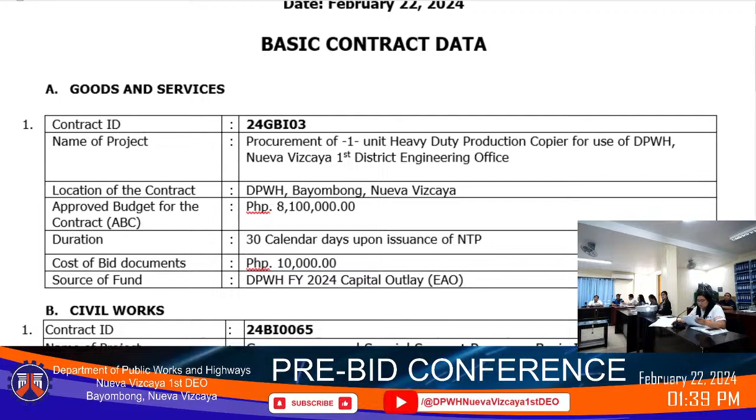The technical specifications for the heavy-duty production copier: for technology, it should have LED printer print technology, with imaging devices for each color — CMYK — and a toner ink system. Print speed for CAD mono or color should be 4 D/A1 prints per minute, or for CAD mono color, 2 E/A0 prints per minute. It should have 9 print modes, a scan resolution of 600 by 600 dpi, and a print resolution of 1200 dpi.

For media handling technology, the auto-switching feature automatically selects the correct roll for the print job based on media type and roll width. It includes automatic roll switching when the end of a roll is reached, automatic width detection, and automatic adjustment of the gap between media and print head. For the scanner, the technology used is CIS, or contact imaging sensor.

The resolution of the scanner is 600 by 600 dpi. The scan speed should be 49.1 per minute monochrome scanning, or 15.2 millimeter per minute monochrome scanning. The controller for the heavy-duty production copier, for the OS operating system, Windows 10.

Processor is 6-core 6-thread i5 8500 at 4.1 GHz. Memory should have 8 GB DDR4. The hard drive is 2 times 500 GB.

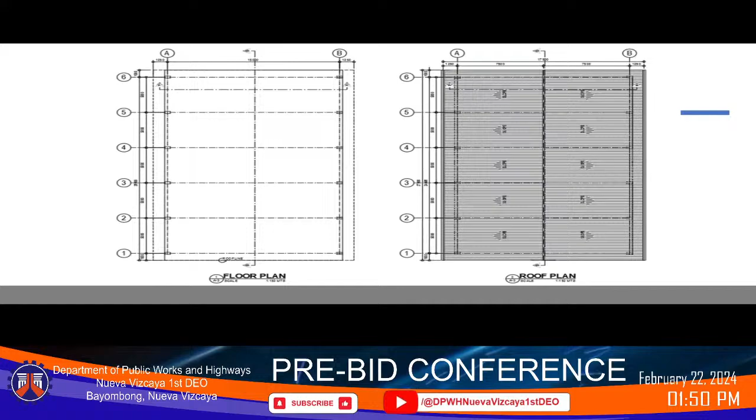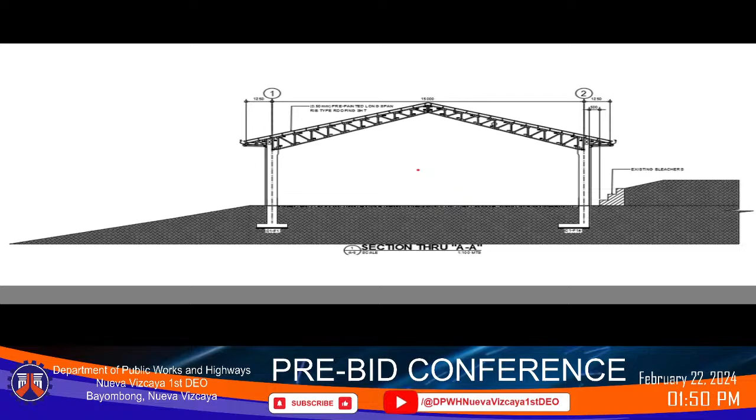Next slide. This is the section through A-A. And this is the perspective view of the project. That would be all, sir. Thank you.

Thank you, Engineer Angie Reyes, the preparer of this first project with contract ID number 24BI0065. Again, may I know from the Secretariat, does anyone from our YouTube live viewers have questions or clarification, especially our prospective bidders for this first project? None? So let's continue, fellow BAC members.

Let's start from provisional member from all types of procurement, Architect IB Salazar. I have no amendment sir. Noted, Architect IB. For our BAC regular member, Engineer Reden A. Milyare, no amendments Mr. Chair. Noted, Engineer Milyare. For our BAC vice chair, Engineer Danilo A. Bernabe, no amendments Mr. Chair. Noted. Since majority of the BAC members have no amendment for this particular project with contract ID number 24BI0065, then we will adopt the basic contract data as advertised. Take note, Engineer Brian Neil Augusto, our head secretariat.

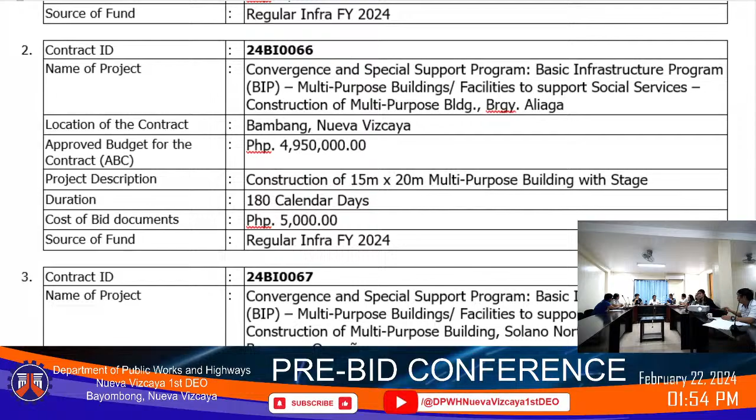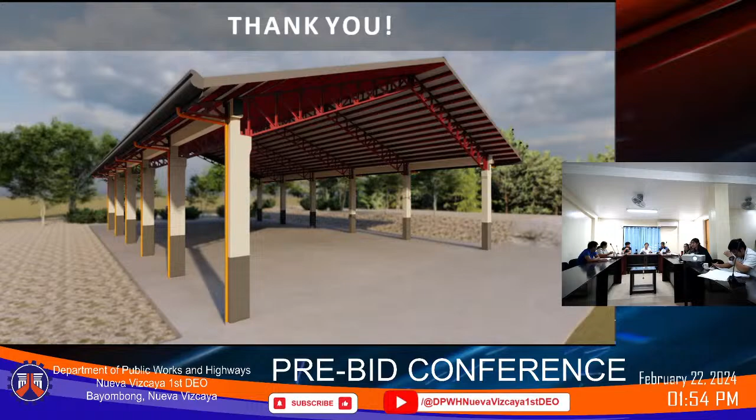So this proposed project entails the construction of a 15 meters by 20 meters covered court and 11.8 meters by 8 meters stage, encompassing all phases of construction, starting with the laying of foundation works, erecting columns and beams, building both interior and exterior walls for the stage, and roofing system. The finishing works will involve plastering and painting for both structures and tile works for the stage. Additionally, the project will incorporate the installation of storm drainage and downspouts for sanitation facilities along with the completion of electrical installations, including lighting and fixtures. The aggregate utilized in the project is extracted from the Kupas Quarry, located at a distance of about 7.58 kilometers from the project site. On the other hand, the materials essential for the project are sourced from Bambang proper.

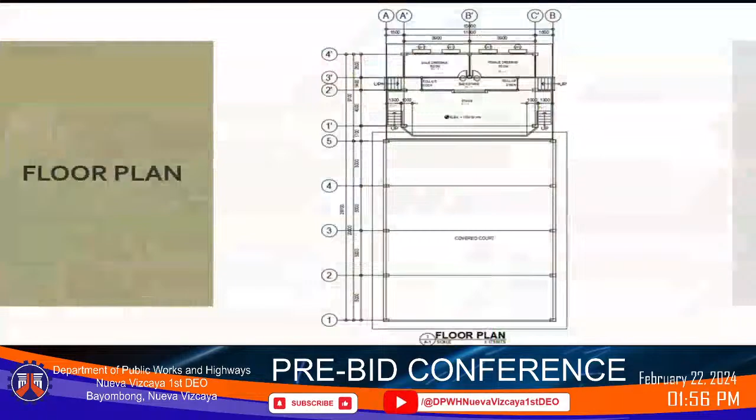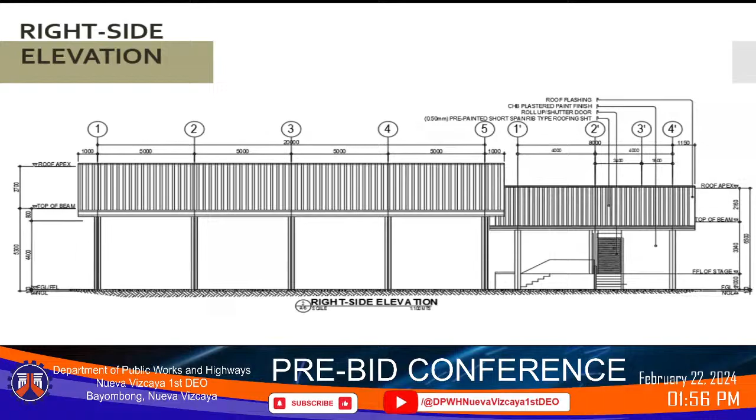Next slide please. So here is the floor plan. Next slide please. The front elevation, rear elevation, right side elevation, and the left side elevation.

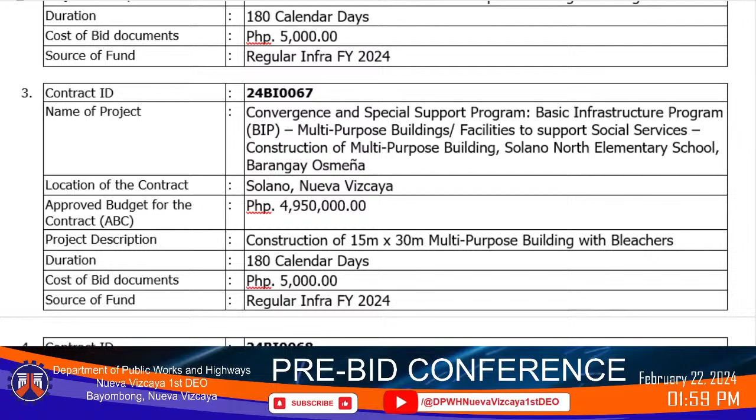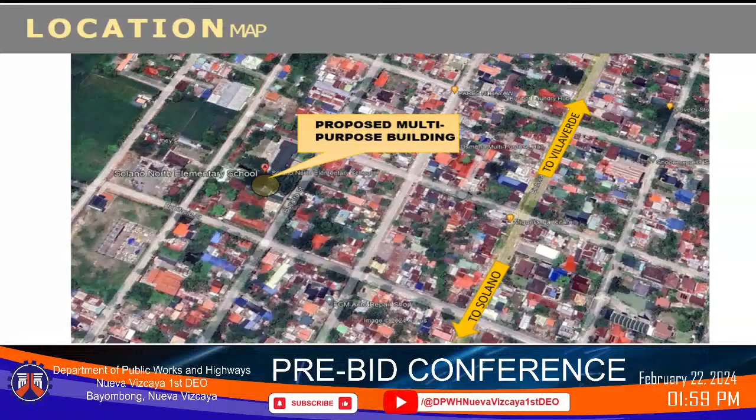Next slide, please. So this is the location map of the project. Next slide. Next slide po. This is a geotag photo with geotag description of 16 degrees, 31 minutes, 20 seconds north, 121 degrees, 10 minutes, and 41 seconds east.

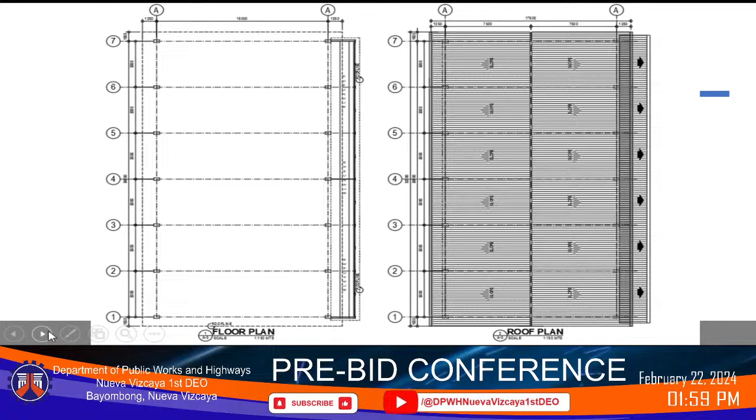Next slide. This is the floor plan and roof plan. Next slide. This is the typical front elevation, rear elevation, and the typical side elevation.

So this project is a construction of 30 meters by 15 meters multipurpose building with bleachers at the right side of the building. This project will be constructed completely from the foundations, columns, beams, and roofing systems. The existing floor slab will be removed and replaced. Storm drainage, electrical wirings, and lighting fixtures will also be provided. The source of aggregate for this project will be in Madyangat Quarry, approximately 5.4 kilometers from project site.

So this is the perspective view of the project. That would be all, sir. Thank you.

Thank you, Engineer Angie Reyes, for your presentation of this project with contract ID number 24BI0067. Again, from the Secretariat, may I know if anyone from our YouTube live viewers, especially our prospective bidders, have questions or clarification regarding this particular project?

None? So, fellow members, let's start from provisional member from all types of procurement, Architect IB Salazar. I have no amendment, sir. Noted. Our board regular member, Engineer Reden A. Milyare. No amendments, Mr. Chair. Noted. Our board Vice Chair, Engineer Danilo A. Bernabe. No amendments, Mr. Chair. Noted. Since majority of the board members have no amendment for this particular project, so take note again, Secretariat will adopt the basic contract data as advertised.

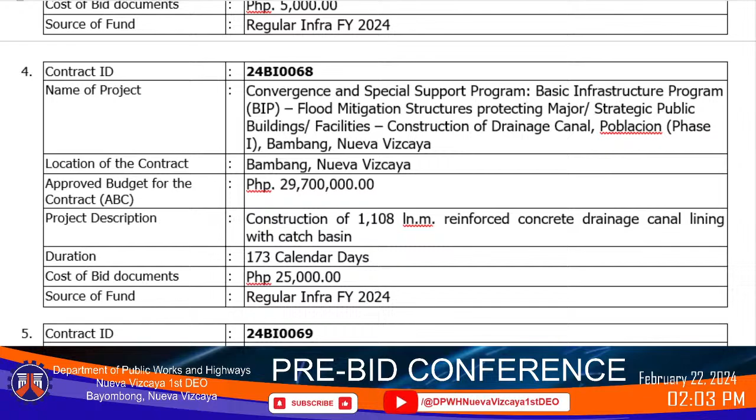This is the location of the drainage canal lining. It is two sections besides the Save More, from Barangay Poblacion, the centro of Bambang, Nueva Vizcaya.

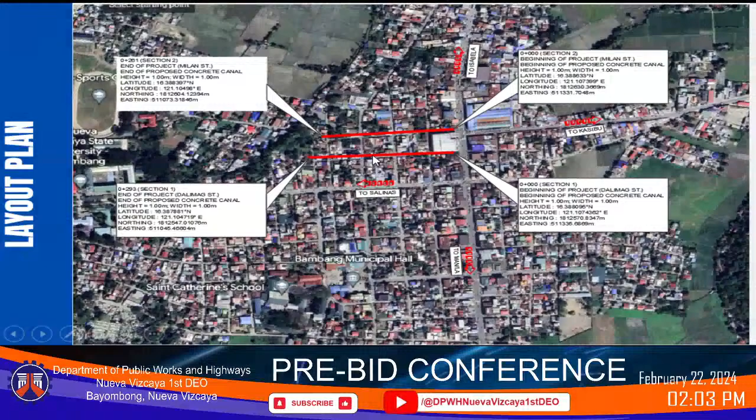This is the project quarry site, the Magat River, Makate section. The project site is located at Poblacion, Bambang, Nueva Vizcaya, 3.7 kilometers from quarry site of Magat River, 400 meters from Bambang Municipal Hall, and the source of cement and RSB at Barangay Poblacion, Bambang, Nueva Vizcaya.

This is the topographic plan of the two sections. Every intersection or corner of the streets has a proposed catch basin with a height of 1.3, width of 1 meter, and a length of 1.60 meters.

This is the beginning of Dalimag Street. The beginning of the project is along the National Highway, and the end of the project is near the end of Boy Street.

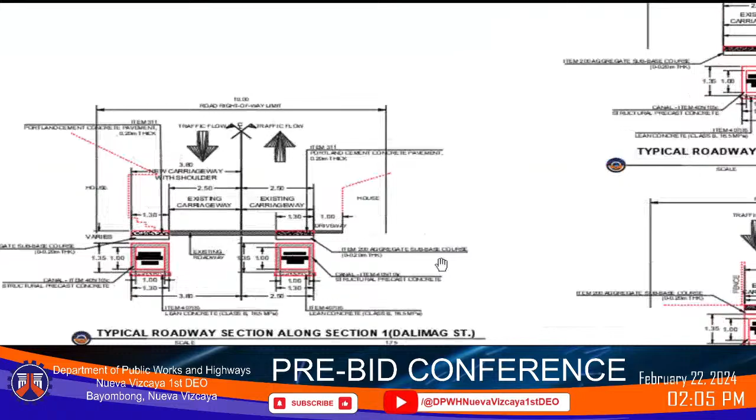This is the typical section of Dalimag Street. The drainage canal has a height of 1.35 and a width of 1.3 meters, with a base of precast lean concrete.

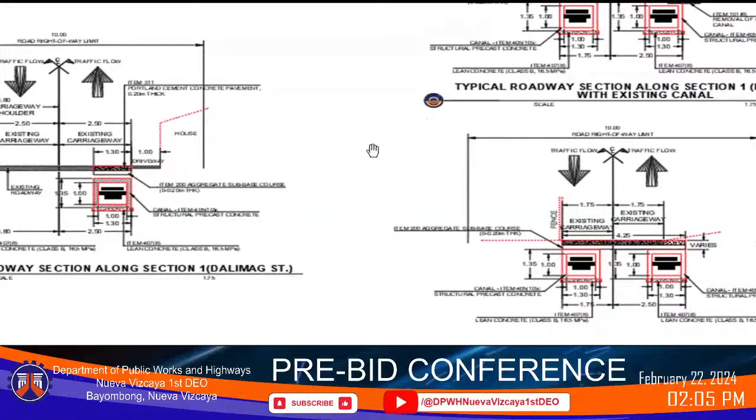This is the typical covered section of a canal with manhole.

And that is the end of my presentation.

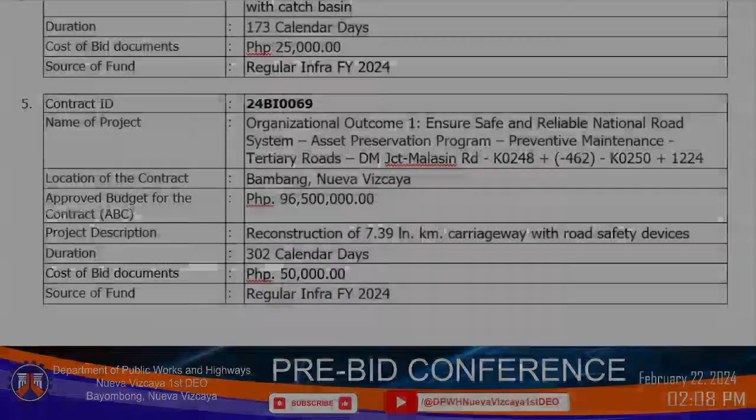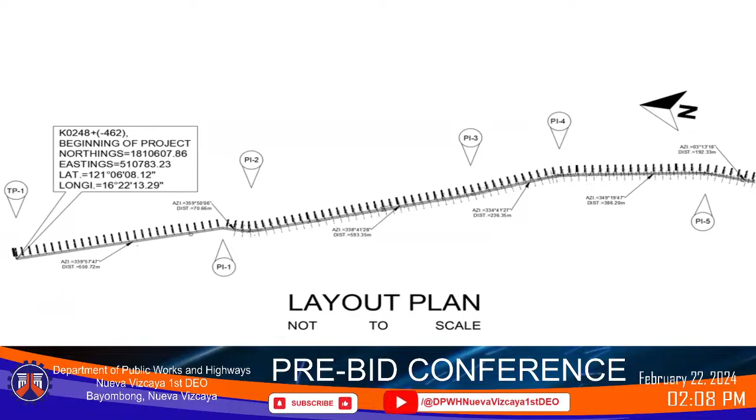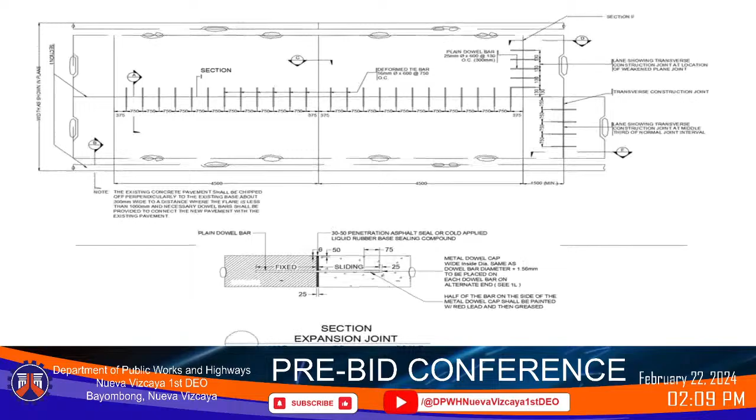The scope of work for this particular project, sir, is the reconstruction of 7.39 lane kilometer road with a thickness of 0.3 meters, and the width is 3.05 meters.

The spacing of the tie bars is 750 mm, and the plain dowel bars use 25 mm diameter, spaced at 130 mm OC.

Another scope of work for this project, sir, is the installation of solar street lights. It is solar powered, LED roadway lighting with 60 watts, with a GSL 36 watt smart LED solar street lights, IP65, in lumens.

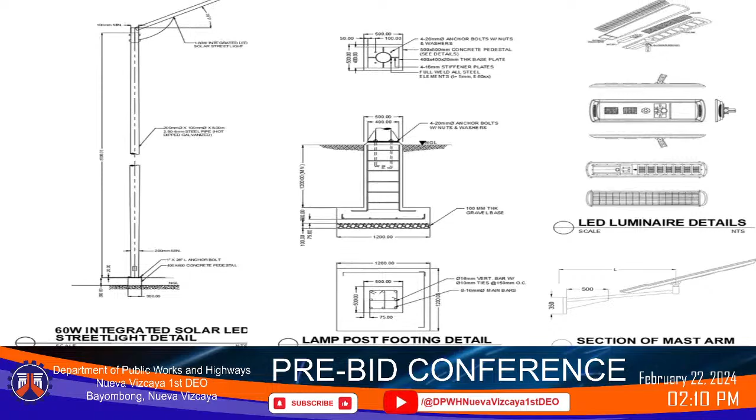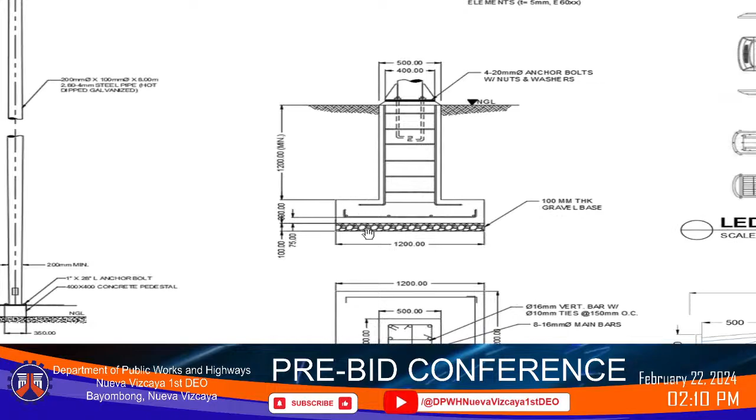It is solar powered. For the base, can you please zoom in for the footing? The dimension is 1.2 meters squared, and the thickness of the footing is 0.3. For the pedestal, up until the NGL, 1.2 minimum. Then the height of the pole is 8 meters.

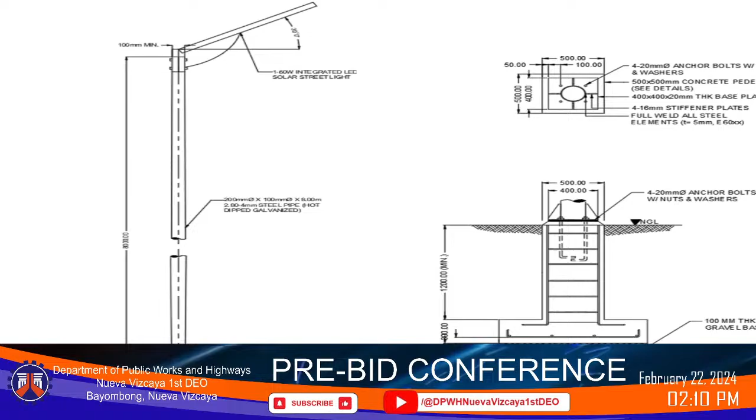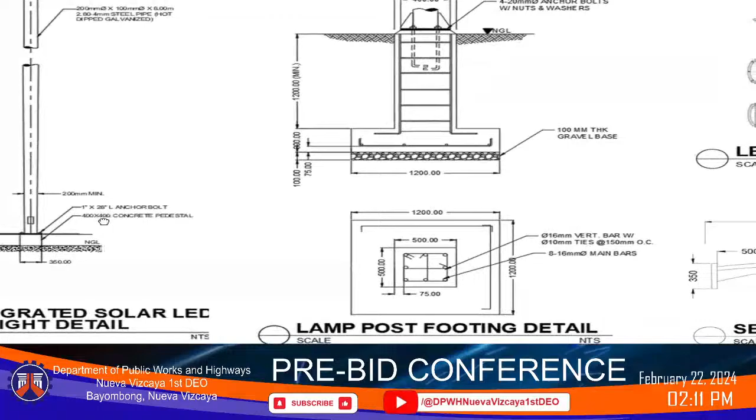8 meters mounting height pole with a 1.5 meter single mast arm at the top for the solar light, with a round steel tapered post, bottom diameter 0.2 and top diameter 0.1. The thickness of the pole is 4 mm. It has a base plate of 20 mm by 400 mm by 400 mm, and a stiffener plate of 16 mm by 200 by 100 by 20 mm, hot dip galvanized.

Another feature for this project is a guardrail with end piece. And I think that's all for the scope of work.

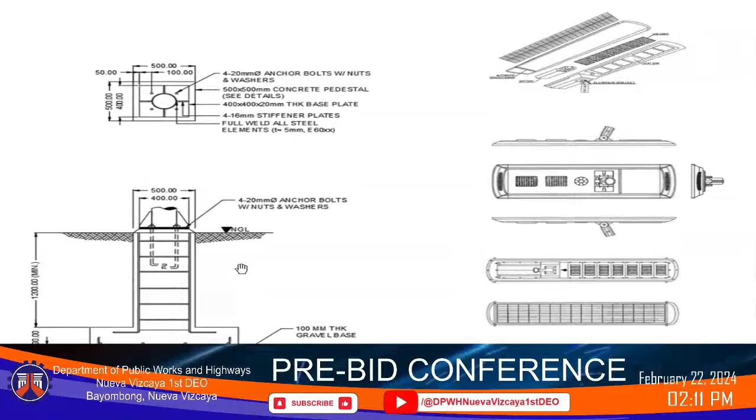I didn't include it, sir, because I forgot to include it. So let me just explain that there is a metal guardrail included in this project, with an end piece on both sides.

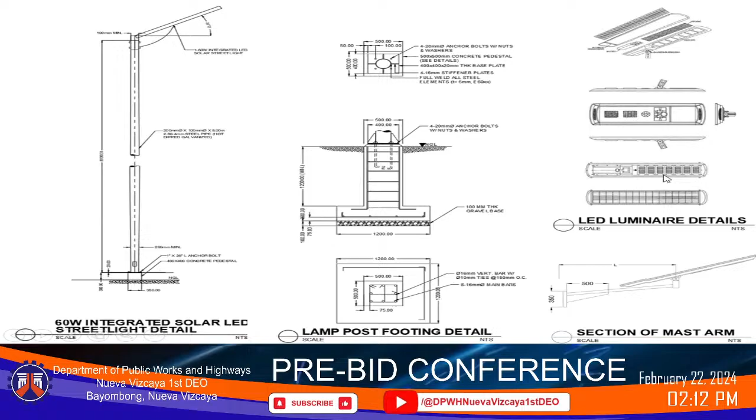Please see the detail of the pedestal of the solar light. If you look at the left side, the one with the solar post, and the NGL on the other side.

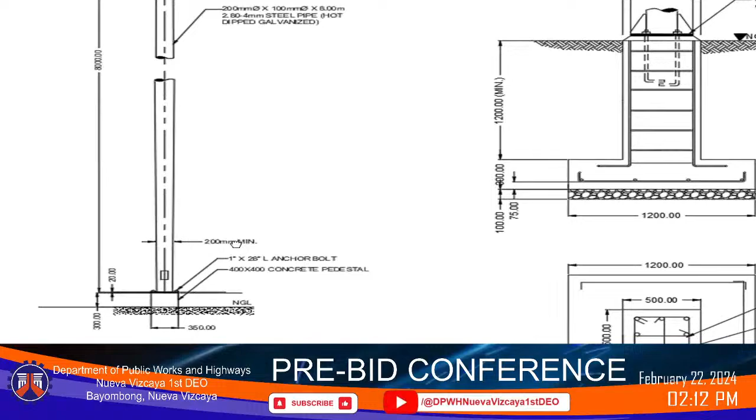The NGL and the top of the pedestal, how much is the difference in elevation? As you can see, sir, we have the dimension at the bottom left at 300 millimeters. Okay, please see the detail of the enlarged pedestal.

Okay sir, let me check through the plan, sir. What is the correct design if it is elevated from the NGL? For the information of our prospective bidders, is the 200 millimeters based from the finish grade line of the pavement? It seems that detail is slightly wrong.

Sir, let me check, sir. But I think the bigger scale model of the pedestal is more correct, I think, sir.

So the top of the pedestal is the top of the NGL? I think so, sir. Are you sure? I'm not sure, sir, but I think that's the case. No, we need to clarify this for the prospective bidders, because if it's like that, there's a tendency that the bolts will rust.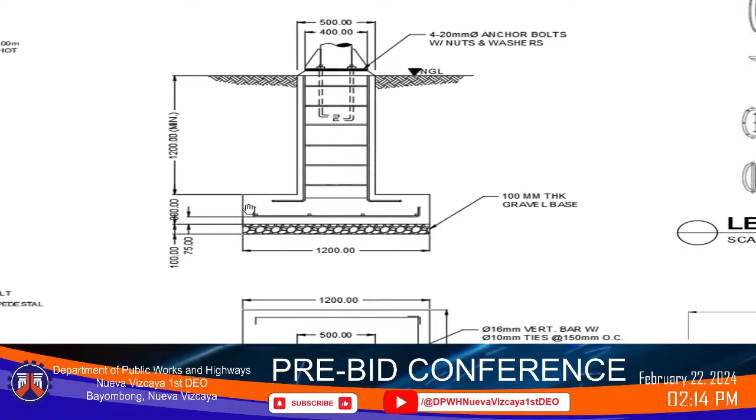Okay, please take note, Engineer Joseph Padukul, for the correction of the detail. And please also add, for the information of our prospective bidders, some details of the guardrail, typical details of the guardrail, to be corrected.

Okay, any other questions from the secretariat, from our YouTube live viewers? Does anyone have any questions or clarification for the last civil works project for the day, with contract ID number 24BI0069? None? Okay, let's continue.

Fellow BAC members, provisional member from all types of procurement, Architect IB Salazar, do we have any amendment? Sir, I have an amendment, sir, for this particular project, regarding the name of the project.

Okay, from Organizational Outcome 1, Ensure Safe and Reliable National Road System, Asset Preservation Program, Preventive Maintenance, Tertiary Roads, DM Junction Malasin Road, K0248 plus negative 462 to K0250 plus 1224.

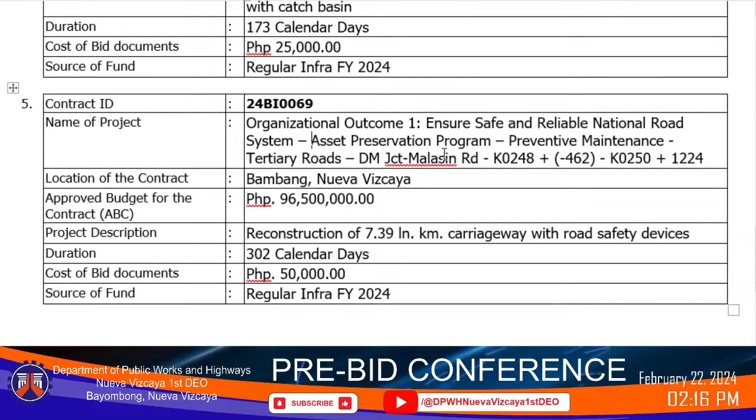2, Organizational Outcome 1, Ensure Safe and Reliable National Road System, Rehabilitation / Reconstruction / Upgrading of damaged paved roads / tertiary roads. That's it, sir.

So we have a correction for the name of project, as per take note, Secretariat. So as per the GAA, the correct name of project includes rehabilitation. So we'll correct, we'll amend the name of the project.

From Organizational Outcome 1, Ensure Safe and Reliable National Road System, Asset Preservation Program, Preventive Maintenance, Tertiary Roads, DM Junction Malasin Road, K0248 plus or minus 462 to K0250 plus 1224. 2: Ensure Safe and Reliable National Road System, Rehabilitation / Reconstruction / Upgrading of damaged paved roads, tertiary roads, K0248 plus or minus 462 to K0250 plus 1224.

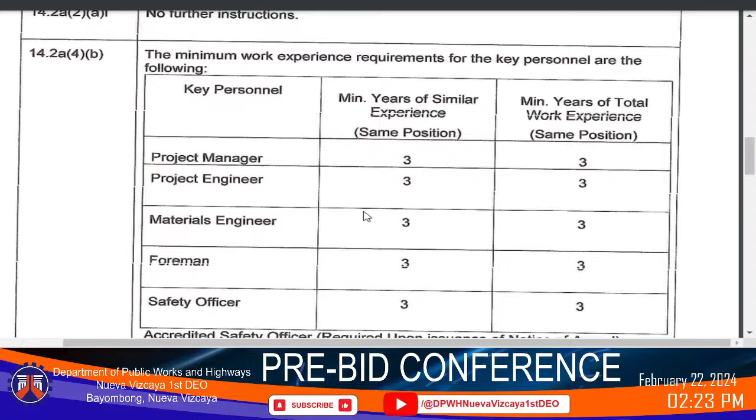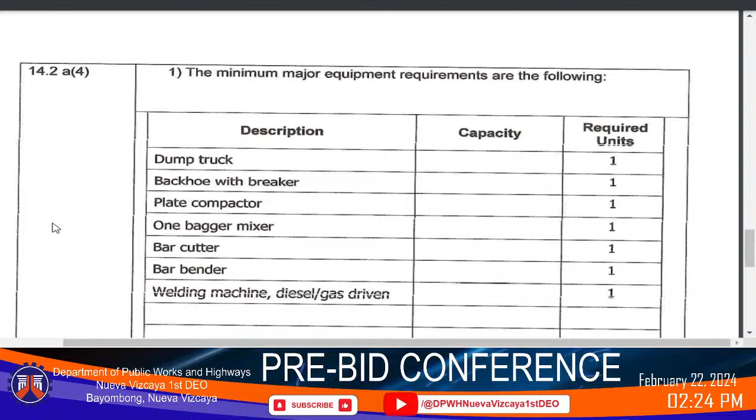For ITB clause 14.2A4, the minimum major equipment requirements are the following: dump truck, required unit 1; backhoe with breaker; plate compactor; one-bagger mixer, required unit 1; bar cutter; bar bender; welding machine, gas-driven, required unit 1. For laboratory equipment, please refer to Department Order number 11, series of 2017, for the minimum materials testing equipment, and Department Order number 127, series of 2018, strict application of Republic Act 9184, the conduct of post-qualification of bidders with delayed ongoing contracts within the DPWH.

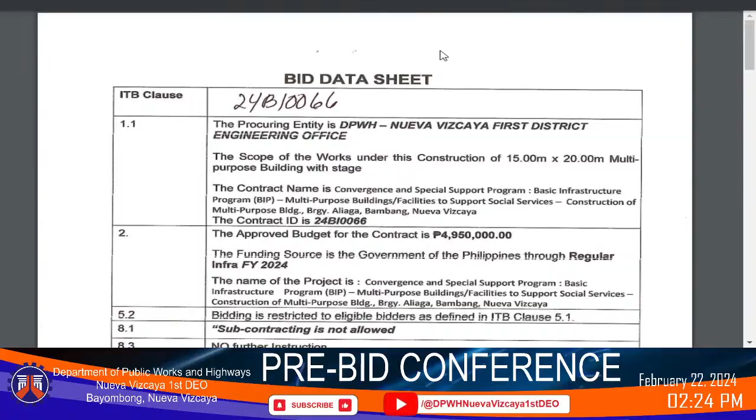For the second project, sir, with contract ID number 24BI0066, construction of multipurpose building, Barangay Aliaga, Bambang, Nueva Vizcaya, for ITB clause 14.2A4B. The minimum work experience requirements for the key personnel are the following: project manager, project engineer, materials engineer, foreman, and safety officer. Minimum years of similar work experience, same position, is 3 years. Minimum years of total work experience, same position, is 3 years.

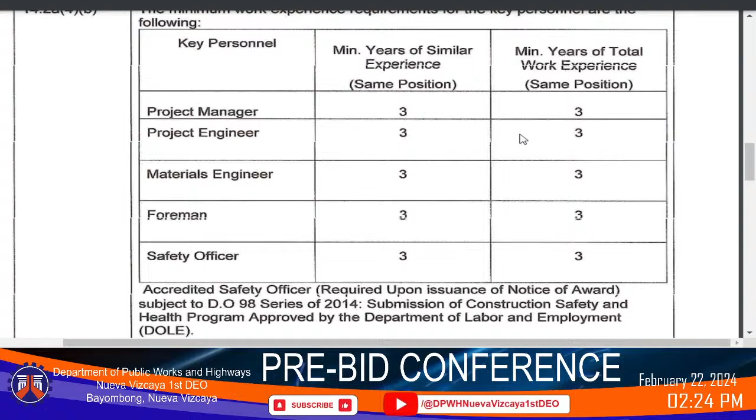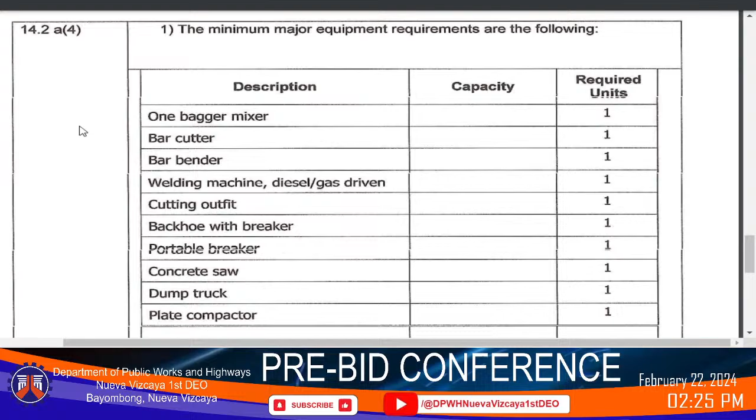For ITB clause 14.2A4, the minimum major equipment requirements are the following: one-bagger mixer, required unit 1; bar cutter; bar bender, required unit 1; welding machine, diesel or gas-driven, required unit 1; cutting outfit; backhoe with breaker, required unit 1; portable breaker, required unit 1; concrete saw; dump truck; and plate compactor, required unit 1. Please refer to Department Order number 11, series of 2017, for the minimum materials testing equipment, and Department Order number 127, series of 2018, strict application of Republic Act 9184, the conduct of post-qualification of bidders with delayed ongoing contracts within the DPWH. For the third project, sir, with contract ID number 24BI0067.

Yes, sir. Merong... Thank you, sir. May I continue?

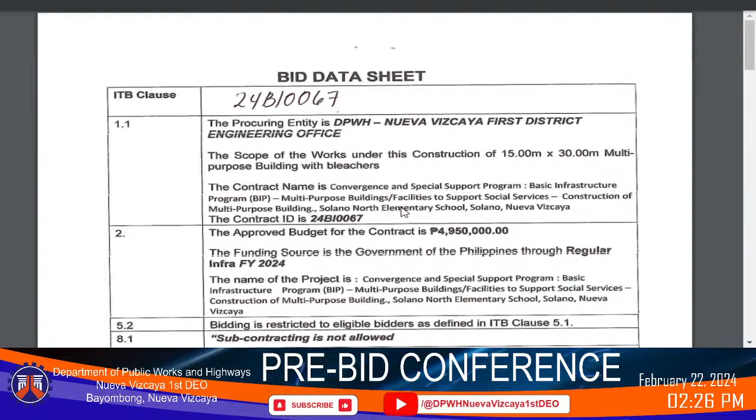For the third project with contract ID number 24BI0067, construction of multipurpose building, Solano North Elementary School, Solano, Nueva Vizcaya, for ITB clause 14.2A4B. The minimum work experience requirements for the key personnel are the following: project manager, project engineer, materials engineer, foreman, and safety officer. Minimum years of similar experience, same position, is 3 years. Minimum years of total work experience, same position, is 3 years.

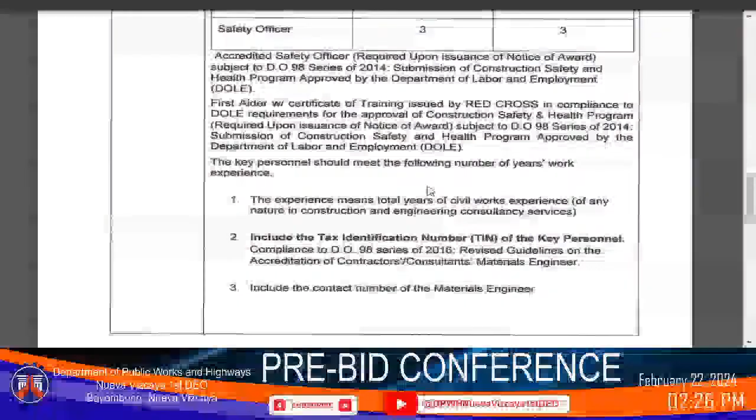For ITB clause 14.2A4, the minimum major equipment requirements are the following: backhoe with breaker, required unit 1; plate compactor; one-bagger mixer; bar cutter; bar bender; and welding machine, required unit 1. That's all, sir.

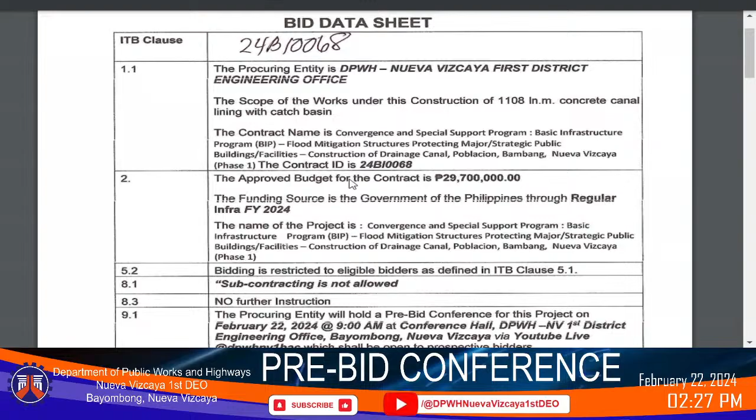For the fourth project, sir, with contract ID number 24BI0068, construction of drainage canal, Poblacion, Bambang, Nueva Vizcaya, for ITB clause 14.2A4B. The minimum work experience requirements for the key personnel are the following: project manager, project engineer, materials engineer, foreman, and safety officer. Minimum years of similar experience, same position, is 3 years. Minimum years of total work experience, same position, is 3 years.

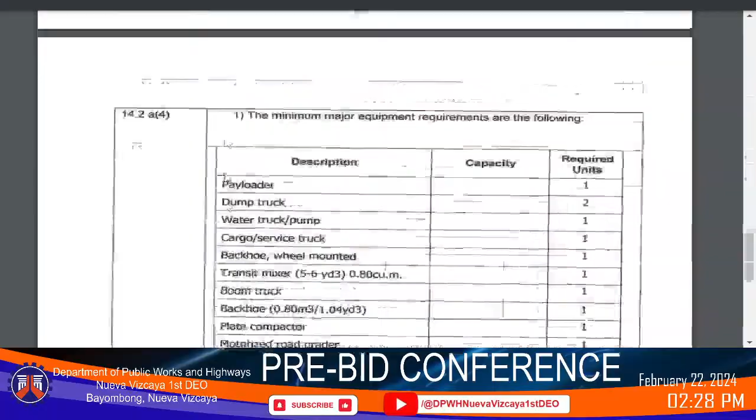For ITB clause 14.2A, the minimum major equipment requirements are the following: payloader, required unit 1; dump truck, required unit 2; water truck or pump, required unit 1; cargo service truck, required unit 1; backhoe wheel-mounted, required unit 1; transit mixer, 5 to 6 cubic yards or 0.80 cubic meter, required unit 1; boom truck, required unit 1; backhoe, 0.80 cubic meter to 1.04 cubic yards, required unit 1.

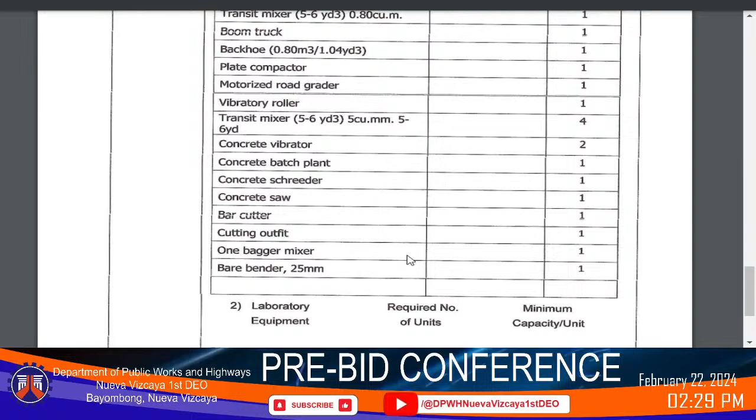Plate compactor, required unit 1; motorized road grader; vibratory roller, required unit 1; transit mixer, 5 to 6 cubic yards, required unit 4; concrete vibrator, required unit 2; concrete batch plant, required unit 1; concrete screeder; concrete saw; bar cutter; cutting outfit; one-bagger mixer; and bar bender, 25 mm, required unit 1. For laboratory equipment, please refer to Department Order number 11, series of 2017, for the minimum materials testing equipment, and Department Order 127, series of 2018, strict application of Republic Act 9184, the conduct of post-qualification of bidders with delayed ongoing contracts within the DPWH.

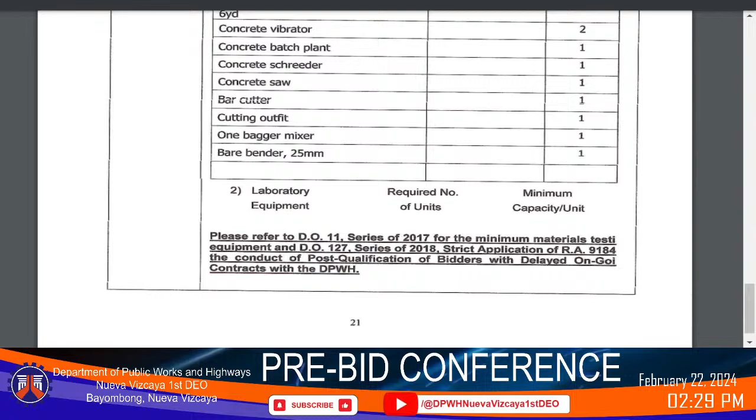For ITB Clause 14.2A, for B, the minimum work experience requirements for the key personnel are the following: for the project manager, project engineer, materials engineer, foreman, and safety officer, minimum years of similar experience in the same position is 5 years, and minimum years of total work experience in the same position is 5 years.

For the major equipment: asphalt paver, pneumatic tire roller 10 metric tons, tandem steel roller 10 metric tons, required units 1; asphalt distributor, required units 1; water truck, payloader, dump truck, motorized grader, power broom, towed type, required units 1.

For laboratory equipment, please refer to Department Order Number 11, Series of 2017, for the minimum materials testing equipment, and Department Order Number 127, Series of 2018, for the strict application of Republic Act 9184 on the conduct of post-qualification of bidders with delayed ongoing contracts within the DPWH.

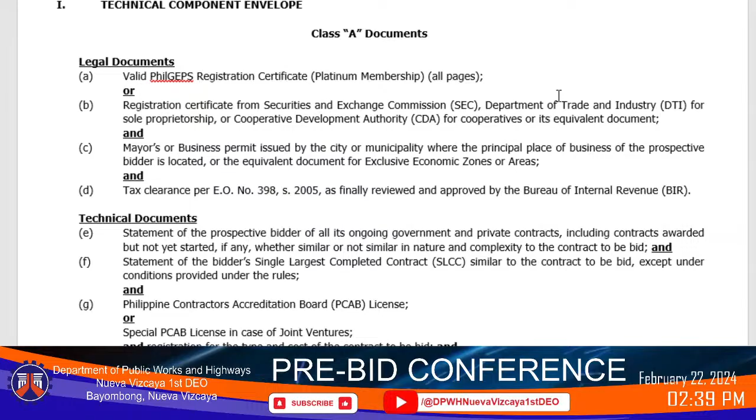of Internal Revenue. For technical documents, letter E, statement of the prospective bidder of all its ongoing government and private contracts, including contracts awarded but not yet started, if any, whether similar or not similar in nature and complexity to the contract to be bid.

And letter F, a statement of the bidder's single largest completed contract, or SLCC, similar to the contract to be bid, except under conditions provided under the rules.

And letter G, Philippine Contractors Accreditation Board, or PCAB license, special PCAB license in case of joint ventures, and registration for the type and cost of the contract to be bid.

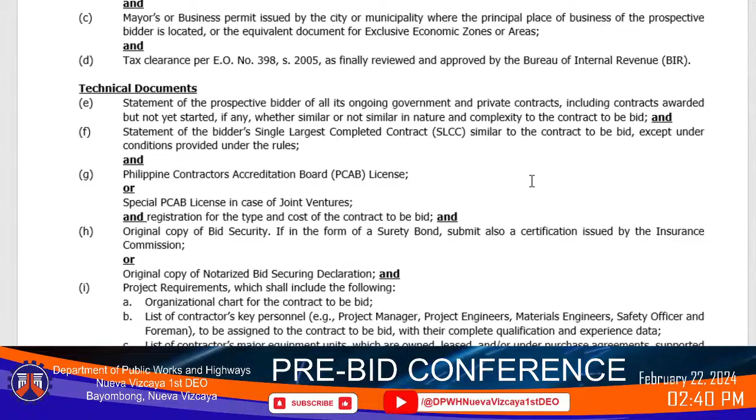And letter H, original copy of bid security in the form of surety bond. Submit also the certification issued by the Insurance Commission, or original copy of notarized bid securing declaration.

And letter I, project requirements, which shall include the following. First, organizational chart for the contract to be bid.

Second, list of contractors' key personnel, for example, project manager, project engineers, materials engineers, safety officer, and foreman, to be assigned to the contract to be bid, with their complete qualification and experience data.

Third, list of contractors' major equipment units, which are owned, leased, and or under purchase agreements, supported by proof of ownership or certification of availability of equipment from the equipment lessor, vendor, for the duration of the project as the case may be. And last, list of contractors' minimum material testing equipment which are owned as per Department Order Number 11, Series of 2017.

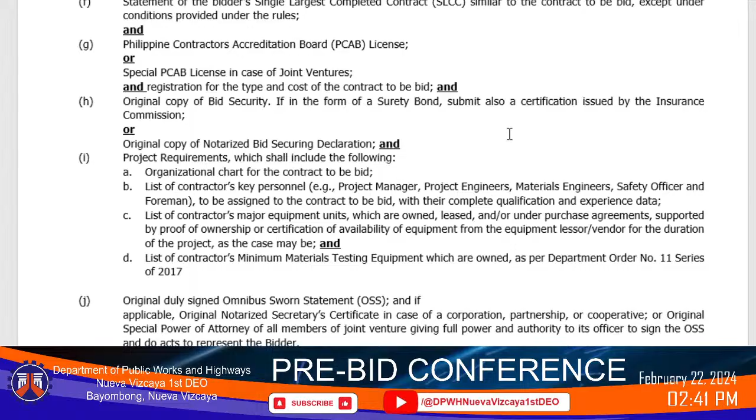For letter J, original duly signed omnibus sworn statement or OSS, and if applicable, original notarized secretary's certificate in case of corporation, partnership, or cooperatives, or original special power of attorney of all members of joint venture, giving full power and authority to its officer to sign the OSS and to do acts to represent the bidder.

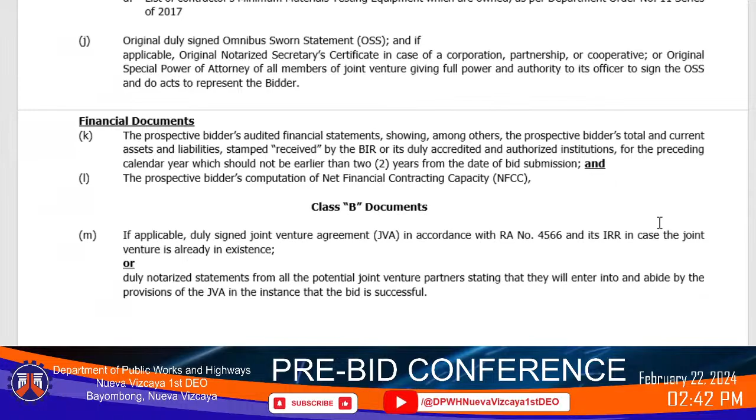For financial documents, letter K, the prospective bidder's audited financial statements showing, among others, the prospective bidder's total and current assets and liabilities, stamp received by the BIR or its duly accredited and authorized institutions for the preceding calendar year, which should not be earlier than 2 years from the date of bid submission.

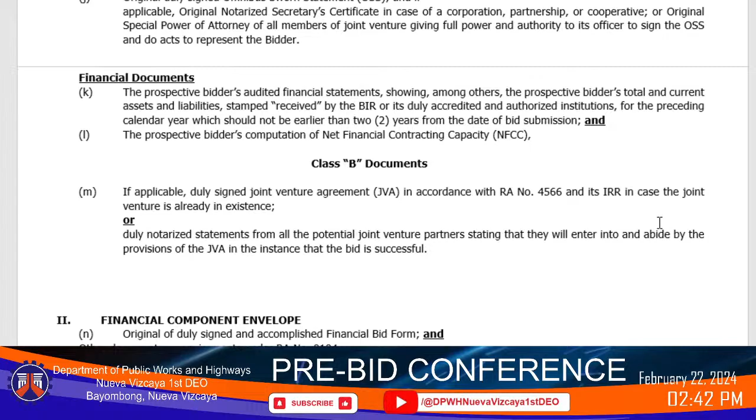And letter L, the prospective bidder's computation of net financial contracting capacity or NFCC, Class B documents.

Letter M, if applicable, duly signed joint venture agreement or JVA in accordance with Republic Act number 4566 and its IRR in case the joint venture is already in existence, or duly notarized statement from all the potential joint venture partners stating that they will enter into and abide by the provisions of the JVA in the instance that the bid is successful.

Number 2, financial component envelope. Letter N, original of duly signed and accomplished financial bid form and other documentary requirements under Republic Act number 9184. Letter O, original of duly signed bid prices in the bill of quantities.

And letter P, duly accomplished detailed estimate form, including a summary sheet indicating the unit prices of construction materials, labor rates, and equipment rental used in coming up with the bid. And letter Q, cash flow by quarter.

Thank you. Again, thank you, Secretariat, through Engineer Brian Nailagusto for the third agenda. So let's continue for the fourth agenda: criteria and procedure for the preliminary examination of the bid, detailed evaluation of bid, post-qualification and award. I request our provisional member for all types of procurement, Architect IB Salazar, for the fourth agenda.

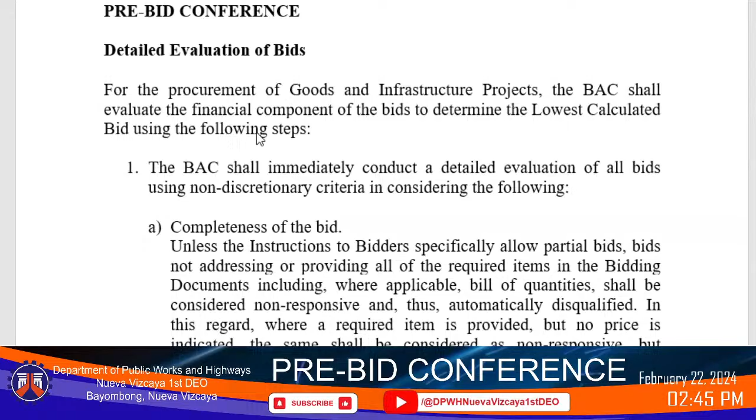The BAC shall immediately conduct a detailed evaluation of all bids using non-discretionary criteria in considering the following: completeness of the bid. Unless the instructions to bidders specifically allow partial bids, bids not addressing or providing all of the required items in the bidding documents, including, where applicable, bill of quantities, shall be considered non-responsive and thus automatically disqualified.

In this regard, where a required item is provided but no price is indicated, the same shall be considered as non-responsive. But specifying a 0 or a dash for the said item would mean that it is being offered for free to the government, except those required by law or regulations to be provided for.

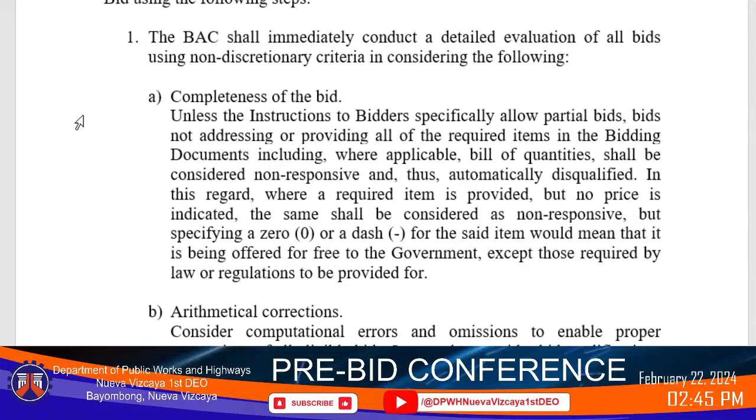Arithmetical corrections consider computational errors and omissions to enable proper comparison of all eligible bids. It may also consider bid modifications if expressly allowed in the bid documents. Any adjustment shall be calculated in monetary terms to determine the calculated prices.

The BAC shall evaluate all bids on an equal footing to ensure fair and competitive bid comparison. For this purpose, all bidders shall be required to include the cost of all taxes, such as, but not limited to, value-added tax, income tax, local taxes, and other fiscal levies and duties, which shall be itemized in the bid form and reflected in the detailed estimates.

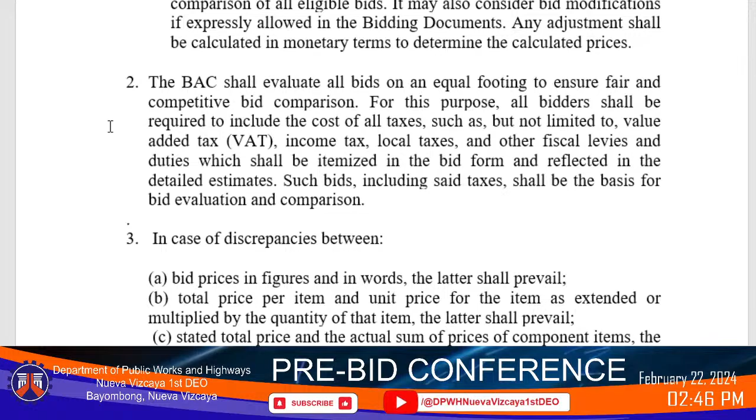Such bids, including said taxes, shall be the basis for bid evaluation and comparison. In case of discrepancies between bid prices in figures and in words, the latter shall prevail. Between total price per item and unit price for the item as extended or multiplied by the quantity of that item, the latter shall prevail. Between stated total price and the actual sum of prices of component items, the latter shall prevail. Between unit cost in the detailed estimate and unit cost in the bill of quantities, the latter shall prevail.

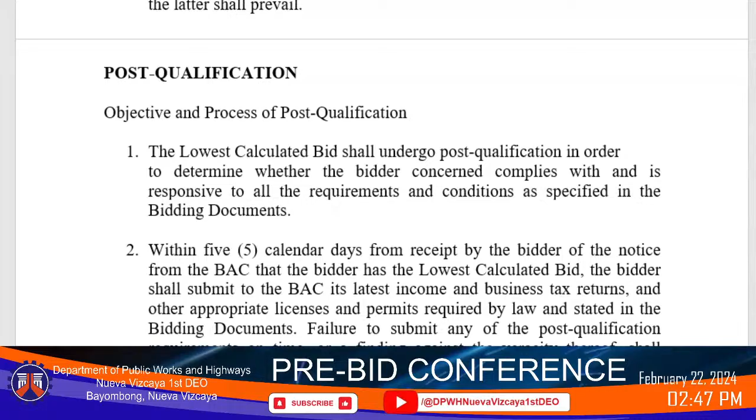Post-qualification: the objective and process of post-qualification. The lowest calculated bid shall undergo post-qualification in order to determine whether the bidder concerned complies with and is responsive to all the requirements and conditions as specified in the bidding documents.

Within 5 calendar days from receipt by the bidder of the notice from the BAC that the bidder has the lowest calculated bid, the bidder shall submit to the BAC its latest income and business tax returns and other appropriate licenses and permits required by law and stated in the bidding documents.

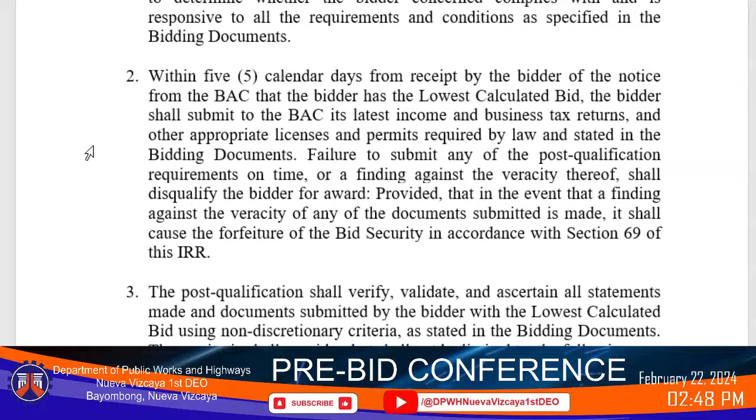Failure to submit any of the post-qualification requirements on time, or a finding against the veracity thereof, shall disqualify the bidder for award, provided that in the event that a finding against the veracity of any of the documents submitted is made, it shall cause the forfeiture of the bid security in accordance with Section 69 of this IRR.

The post-qualification shall verify, validate, and ascertain all statements made and documents submitted by the bidder with the lowest calculated bid, using non-discretionary criteria as stated in the bidding documents. These criteria shall consider, but shall not be limited to, the following.

Legal requirements: to verify, validate, and ascertain licenses, certificates, permits, and agreements submitted by the bidder, and the fact that it is not included in any blacklist as provided in Section 25.3 of this IRR. For this purpose, the GPPB shall maintain a consolidated file of all blacklisted suppliers, contractors, and consultants.

Technical requirements: to determine compliance of the infrastructure projects offered with the requirements specified in the bidding documents, including, where applicable, verification and validation of the bidder's stated competence and experience, and the competence and experience of the bidder's key personnel to be assigned to the project for the procurement of infrastructure projects.

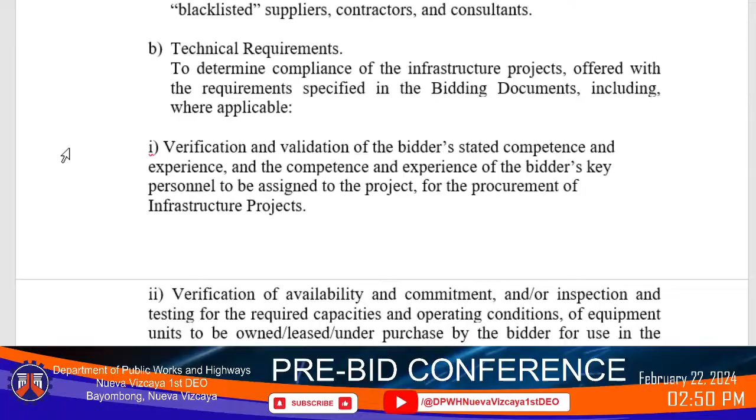Verification of availability and commitment, and/or inspection and testing for the required capacities and operating conditions of equipment units to be owned, leased, under purchase by the bidder for use in the contract.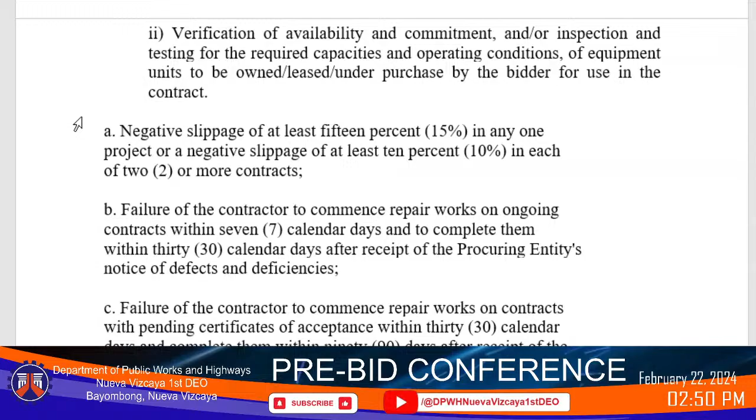Negative slippage of at least 15% in any one project, or a negative slippage of at least 10% in each of 2 or more contracts.

Failure of the contractor to commence repair works on ongoing contracts within 7 calendar days, and to complete them within 30 calendar days after receipt of the procuring entity's notice of defects and deficiencies.

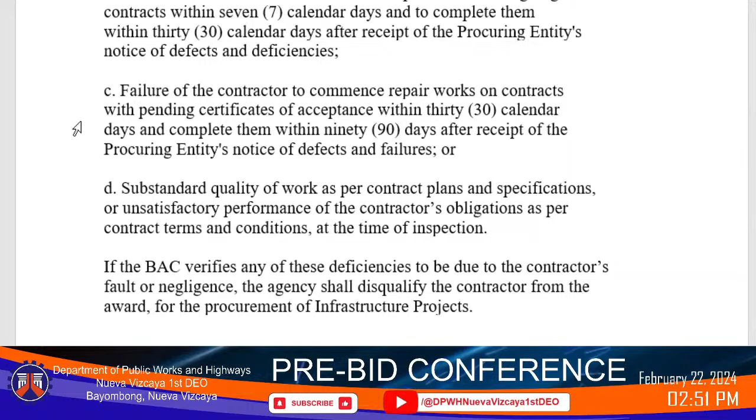Failure of the contractor to commence repair works on contracts with pending certificates of acceptance within 30 calendar days, and complete them within 90 days after receipt of the procuring entity's notice of defects and failures, or substandard quality of work as per contract plans and specifications, or unsatisfactory performance of the contractor's obligations as per contract terms and conditions at the time of inspection.

If the BAC verifies any of these deficiencies to be due to the contractor's fault or negligence, the agency shall disqualify the contractor from the award for the procurement of infrastructure projects.

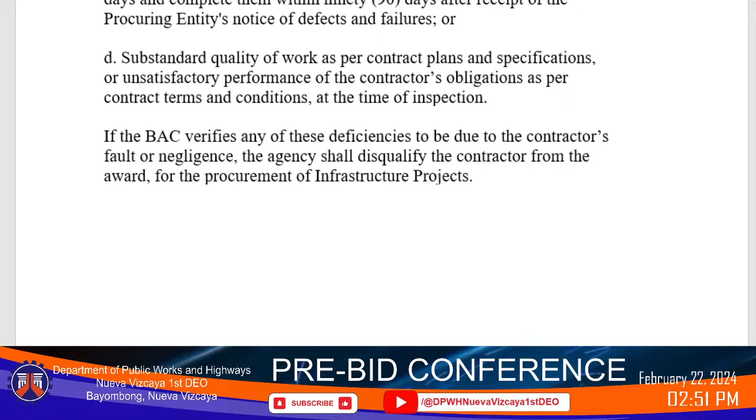Thank you for the fourth agenda. Then we'll continue for the fifth agenda, which is the questions and comments from bidders and replies of BAC and other representatives of the procuring entity. Again, may I ask the Secretariat, does anyone have any question or comments on the agenda tackled?

None. So being none, let's proceed to agenda number 7, summary of proceedings, including bid bulletins and addenda to be issued. We already have an amendment for the 6th project. Please take note, Engineer Brian Neil Augusto, our head secretariat, particularly the name of the project, the project description, and the equipment requirements for the bidding documents. Noted, Mr. Chair. Okay, so we'll continue for the other matters.

Again, may I request Engineer Brian Neil Augusto if we have any announcement or reminders to make. Thank you again, Mr. Chair. We have an announcement reminder, sir, for the next procurement activities. Engineer Brian, kindly read all the details of the next procurement activities. Thank you, Mr. Chair. The announcement reminder for the next procurement activities is the opening of bids for 10 civil works projects on February 27, 2024 at 9:01 a.m.

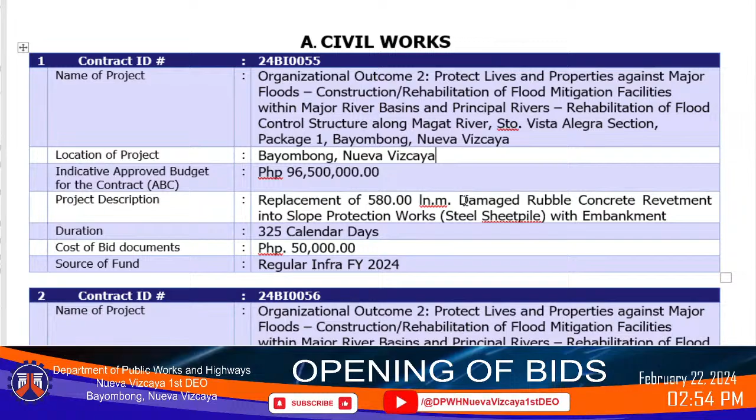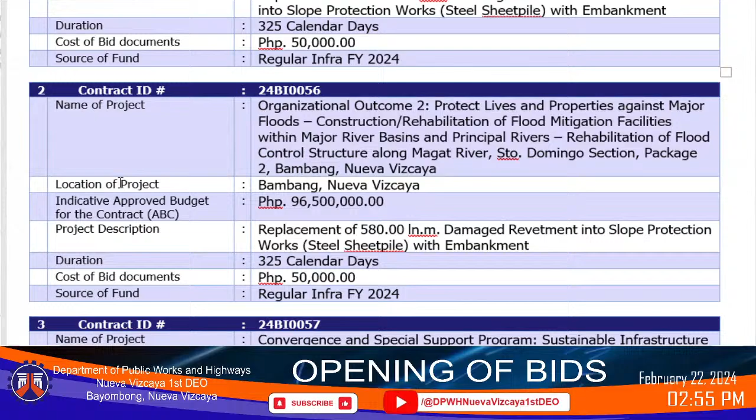For the second project, with contract ID number 24BI0056, name of the project: Organizational Outcome 2, Protect Lives and Properties Against Major Floods, Construction/Rehabilitation of Flood Mitigation Facilities within Major River Basins and Principal Rivers, Rehabilitation of Flood Control Structure along Magat River, Santo Domingo Section, Package 2, Bambang, Nueva Vizcaya. Location of the project is at Bambang, Nueva Vizcaya, with an indicative ABC of 96,500,000 pesos. Project description: replacement of 580 linear meters of damaged revetment into slope protection works, steel sheet piles with embankment, and a project duration of 325 calendar days. Cost of bidding documents is 50,000 pesos, and the source of fund is regular infra FY 2024.

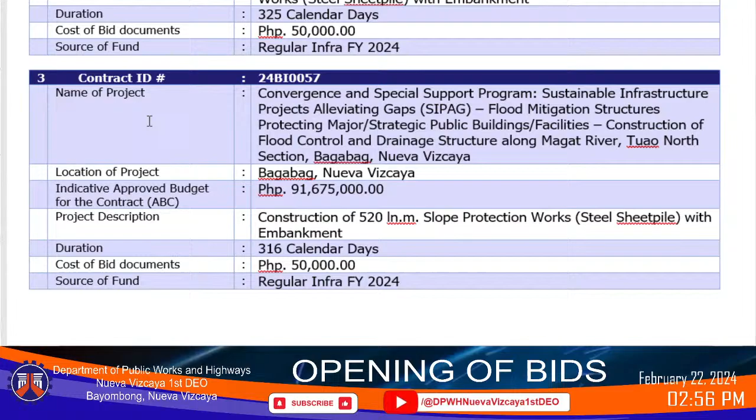For the third project, with contract ID number 24BI0057, name of the project: Convergence and Special Support Program, Sustainable Infrastructure Projects Alleviating Gaps (SIPAG), Flood Mitigation Structures Protecting Major Strategic Public Buildings and Facilities, Construction of Flood Control and Drainage Structure along Magat River, Tuao North Section, Bagabag, Nueva Vizcaya. Location of the project is at Bagabag, Nueva Vizcaya, with an indicative ABC of 91,675,000 pesos, and a project description of construction of 520 linear meters of slope protection works, steel sheet pile with embankment, and a project duration of 316 calendar days. Cost of bidding documents is 50,000 pesos, and the source of fund is regular infra FY 2024.

For the fourth project, with contract ID number 24BI0058, name of the project: Convergence and Special Support Program, Sustainable Infrastructure Projects Alleviating Gaps (SIPAG), Flood Mitigation Structures Protecting Major Strategic Public Buildings and Facilities, Construction of Flood Control and Drainage Structure along Magat River, Tuao South Section, Bagabag, Nueva Vizcaya. Location of the project is at Bagabag, Nueva Vizcaya, with an indicative ABC of 89,745,000 pesos, and a project description of construction of 480 linear meters of slope protection works, steel sheet pile with embankment, and a project duration of 316 calendar days. Cost of bidding documents is 50,000 pesos, and the source of fund is regular infra FY 2024.

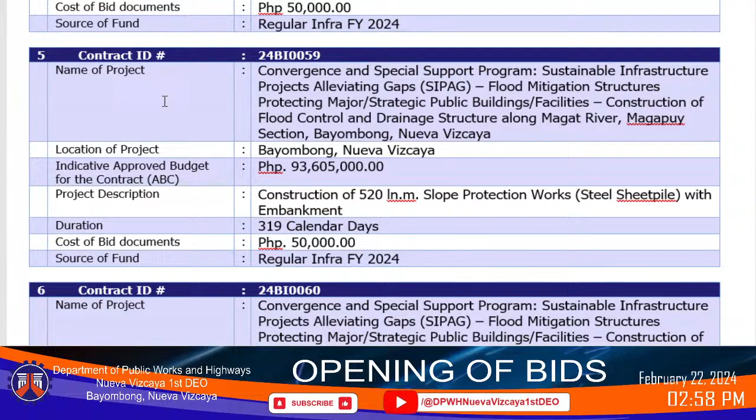For the fifth project, with contract ID number 24BI0059, name of the project: Convergence and Special Support Program, Sustainable Infrastructure Projects Alleviating Gaps (SIPAG), Flood Mitigation Structures Protecting Major Strategic Public Buildings and Facilities, Construction of Flood Control and Drainage Structure along Magat River, Magapuy Section, Bayombong, Nueva Vizcaya. Location of the project is at Bayombong, Nueva Vizcaya, with an indicative ABC of 93,605,000 pesos only, and a project description of construction of 520 linear meters of slope protection works, steel sheet pile with embankment, and a project duration of 319 calendar days. Cost of bidding documents is 50,000 pesos, and the source of fund is regular infra FY 2024.

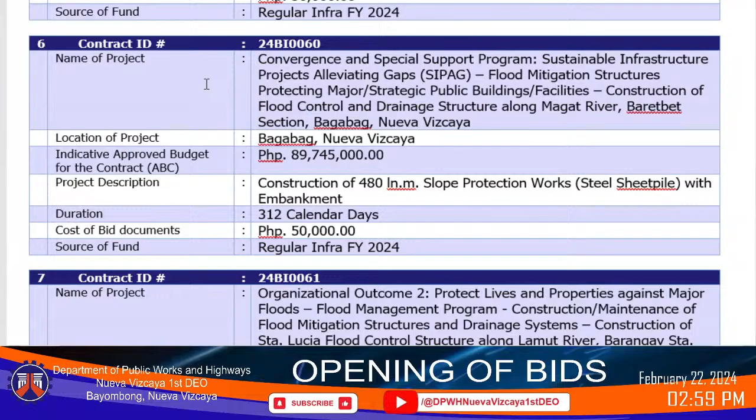For the sixth project, contract ID number 24BI0060, name of project: Convergence and Special Support Program, Sustainable Infrastructure Projects Alleviating Gaps or SIPAG, Flood Mitigation Structure Protecting Major Strategic Public Buildings and Facilities, construction of flood control and drainage structure along Magat River, Baretbet section, Bagabag, Nueva Vizcaya. Location is Bagabag, Nueva Vizcaya, with an indicative approved budget for the contract of 89,745,000 pesos. Project description: construction of 480 linear meter slope protection works, steel sheet pile with embankment, project duration of 312 calendar days. Cost of bidding documents is 50,000, source of fund is regular infra FY 2024.

For the seventh project, contract ID number 24BI0061, organizational outcome 2: protect lives and properties against major flood, flood management program, construction and maintenance of flood control, flood mitigation structures and drainage systems, construction of Santa Lucia flood control structure along Lamut River, Barangay Santa Lucia, Bagabag, Nueva Vizcaya. Location is Bagabag, Nueva Vizcaya, with an indicative approved budget of 96,500,000 pesos. Project description: construction of 560 linear meter slope protection works, steel sheet pile with embankment, duration of 324 calendar days. Cost of bidding documents is 50,000, source of fund is regular infra FY 2024.

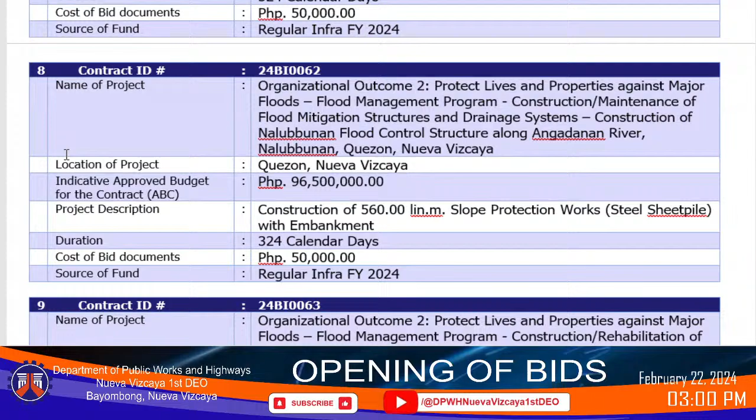For the eighth project, contract ID number 24BI0062, organizational outcome 2: protect lives and properties against major floods, flood management program, construction and maintenance of flood mitigation structure and drainage system, construction of Nalubbunan flood control structure along Angadanan River, Nalubbunan, Quezon, Nueva Vizcaya. Location is Quezon, Nueva Vizcaya, with an indicative approved budget of 96,500,000 pesos only. Project description: construction of 560 linear meter slope protection works, steel sheet pile with embankment, project duration of 324 calendar days. Cost of bidding documents is 50,000, source of fund is regular infra FY 2024.

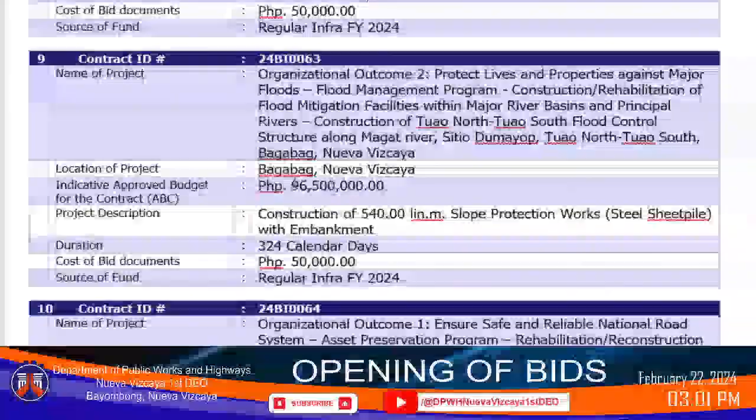For the ninth project, contract ID number 24BI0063, organizational outcome 2: protect lives and properties against major floods, flood management program, construction and rehabilitation of flood mitigation facilities within major river basins and principal rivers, construction of Tuao North and Tuao South flood control structure along Magat River, Sitio Dumayop, Tuao North and Tuao South, Bagabag, Nueva Vizcaya. Location is Bagabag, Nueva Vizcaya, with an indicative approved budget of 96,500,000 pesos. Project description: construction of 540 linear meter slope protection works, steel sheet pile with embankment, project duration of 324 calendar days. Cost of bidding documents is 50,000, source of fund is regular infra FY 2024.

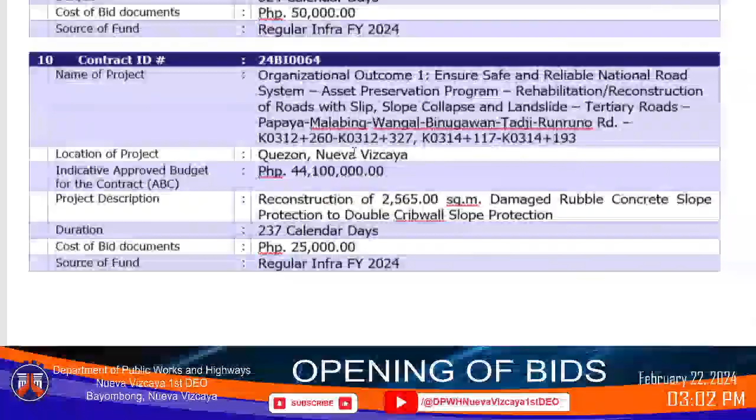For the 10th and last project, contract ID number 24BI0064, organizational outcome 1: ensure safe and reliable national road system, asset preservation program, rehabilitation and reconstruction of roads with slip, slope collapse and landslide, tertiary roads: Papaya, Malabing, Wangal, Binugawan, Tadji, Runruno Road, from K0312 plus 260 to K0312 plus 327, and K0314 plus 117 to K0314 plus 193. Location is Quezon, Nueva Vizcaya, with an indicative approved budget of 44,100,000 pesos. Project description: reconstruction of 2,565 square meter damaged rubble concrete slope protection to double crib wall slope protection, project duration of 237 calendar days. Cost of bidding documents is 25,000, source of fund is regular infra FY 2024.

That's all for the 10 civil works projects scheduled on February 27, 2024.

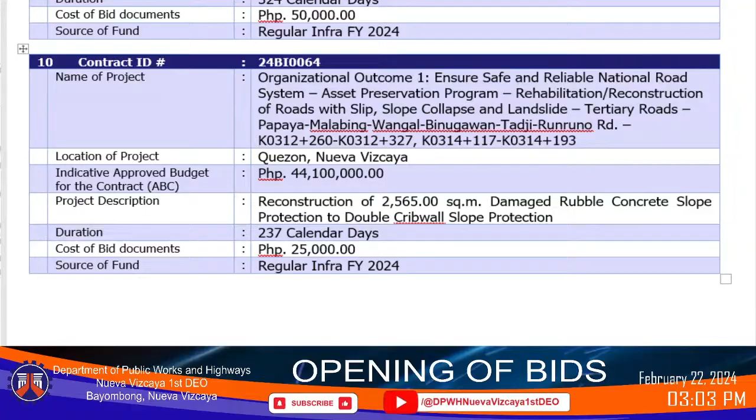So again, do you have any other business from the Secretariat? Does anyone have any questions or clarifications for the recently concluded pre-bid conference?

Okay, none? Being none, can I hear a motion to adjourn?

Since we are finished with the pre-bid conference for one goods and services and five civil works, and announcements have been made for the next procurement activity for 10 civil works, and there is no further agenda, I move to close this procurement activity.

I second, Mr. Chair.